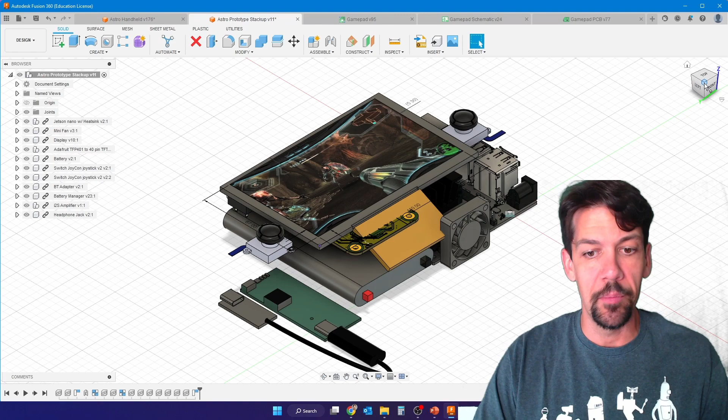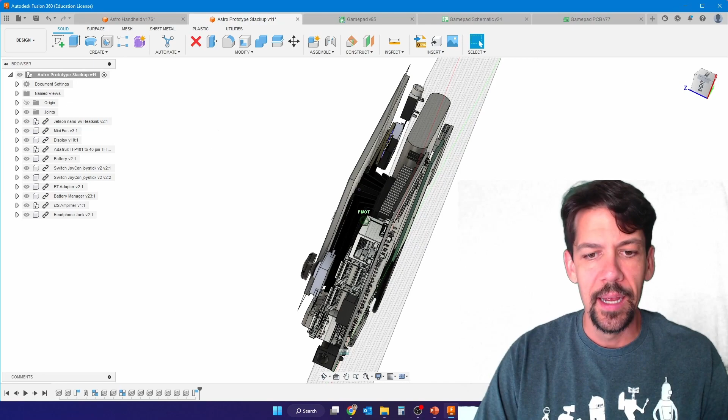The first thing I did to figure out if everything would fit was model all the things I already knew I could use that were in my junk drawer, or find existing 3D models for — for example, the Switch joysticks, the Jetson Nano module itself. I modeled the battery, the power distribution board, the fan, and all the big components myself, or found 3D models for them. I was also able to find 3D models for off-the-shelf boards like the amplifier module and the HDMI to TFT board from Adafruit.

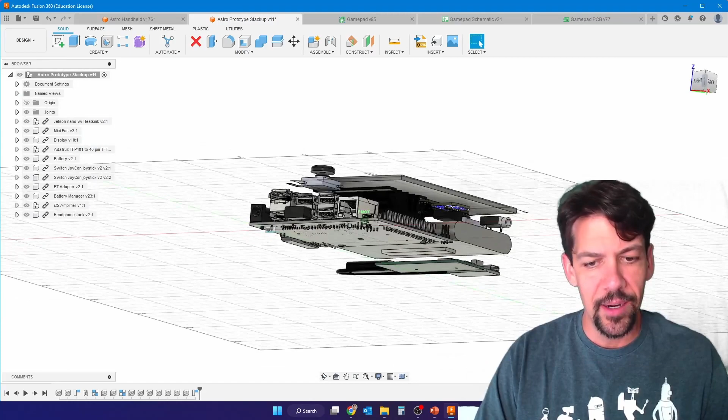I spent a lot of time figuring out how all these components would fit together in the most efficient space possible, trying to get that into a handheld form factor. You can see it's pretty crammed in there.

The majority of the problem was figuring out how to get the heatsink in there. If I had replaced the heatsink or used a different cooling solution, I probably could have gotten it a little thinner, but not too much, because the battery is also very thick, and there's going to be some electronics in between anyhow.

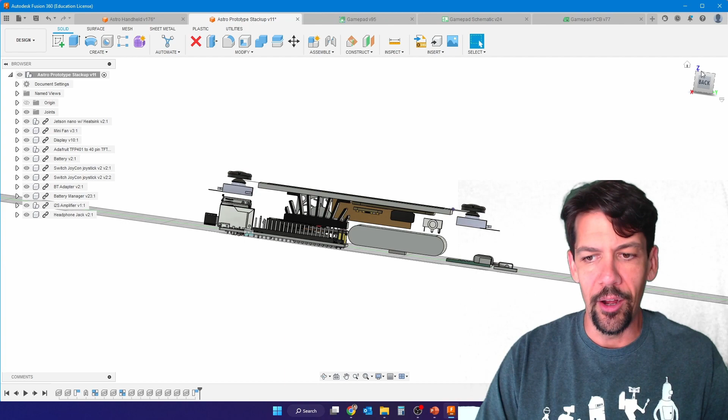This stack-up was really useful, and I used this arrangement of the electronics as a framework to build the case around. Rather than building the case first and figuring out how components would fit inside, I started with getting the components where I wanted them, then built the case around them, which actually worked out really well.

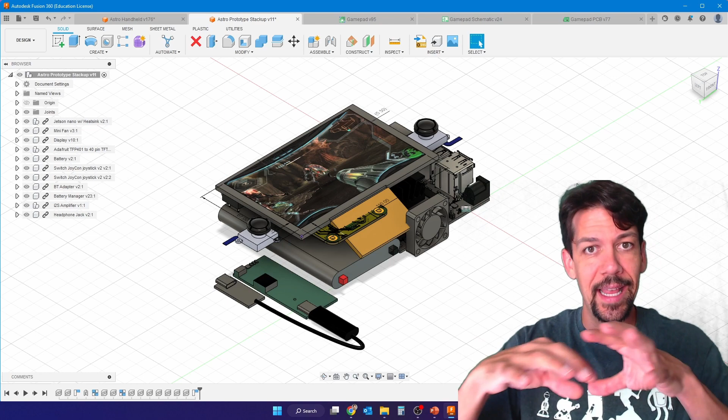I was going back and forth with design and electronics, figuring out all these different things. I was also doing power tests, focused on figuring out if I could run the Jetson Nano off the battery bank system I had, and if I could push enough current to do those high performance emulation tasks.

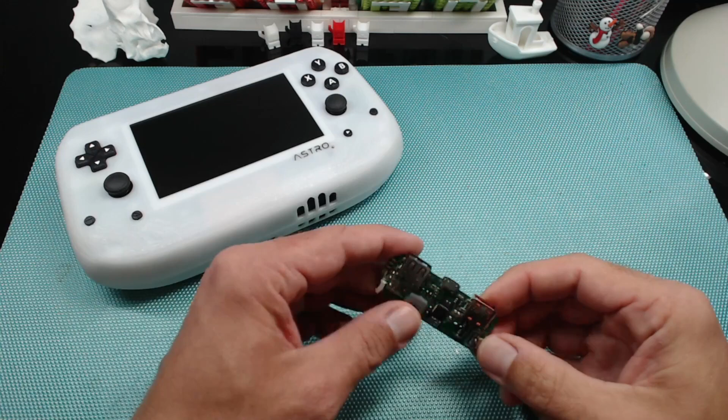For power, I had these 10,000 milliamp hour power banks with outputs that could supply combined, I think, up to 4 amps total, probably more. Inside them there's a little manager board where one output is rated for 3 amps and the other for 1 amp.

I ended up testing to see if I could combine them so that in parallel they both provide enough current to drive the Jetson Nano, and that worked out really well. I originally thought I could talk to the fuel gauge microcontroller chip on this thing directly using I2C, but it turns out there's a secondary microcontroller that manages the power delivery of this management board.

So I couldn't talk directly to it without sacrificing power management, and there wasn't a breakout for it. So it ended up being a little weird, but I was able to fit the battery and the power management board in the system, and I used the LEDs on the side of the power management board as the battery indicator through the case, which I think looks super sharp, and I'm really proud of that part.

I had originally connected the battery using 1/10 of an inch headers and header pins, and it turns out those are not rated for the amount of current that this thing needs. So I had some brownout difficulties when my original testing with just the power bank had worked just fine. I identified that by accident, actually felt after doing a run, the connector had heated up a little bit, and I was like, oh, I'm an idiot.

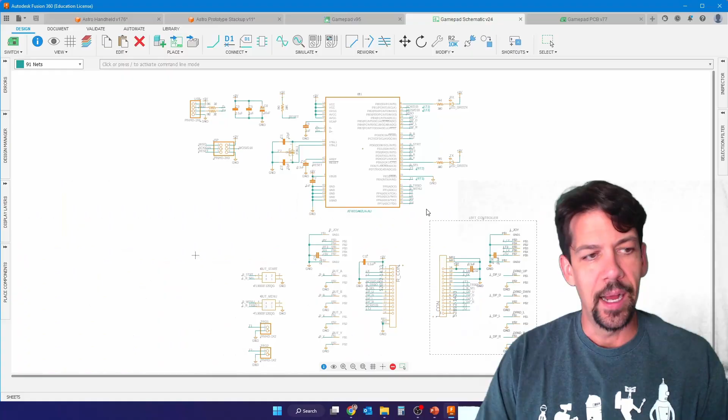I could design the gamepad schematic, lay out the printed circuit board, and then translate this PCB layout into a three-dimensional model that I could include in my major design, all in one thing. Any changes I make upstream in the schematic or the PCB layout automatically get changed in the design as a whole, which is really, really cool.

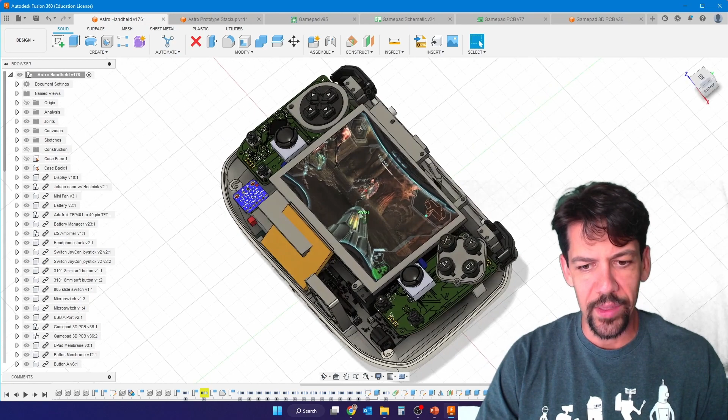Also, all of the interaction between all of these components is really, really powerful. So for instance, let me turn off the case face - this is the device without that case face on it. You can see I modeled the D-pad, the buttons and membranes, the joysticks were already modeled, I included the PCBs, all kinds of stuff. Any changes I make to those positions, all of the holes in the case face are related to the position of those things. So layout and changing things is as simple as moving the objects around in the model environment, and the rest of the design updates around them.

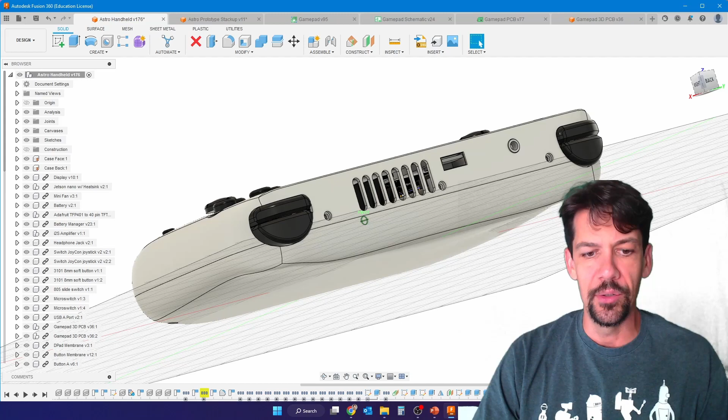That became super handy when I was going through iterations to design the trigger buttons and shoulder buttons. I went through like 4 iterations, trying out different things and seeing what worked - every time figuring out where the cutouts are and what the design for the buttons should be. I could design all of those things upstream and the whole cutout would change, and doing revisions on them worked out really well.

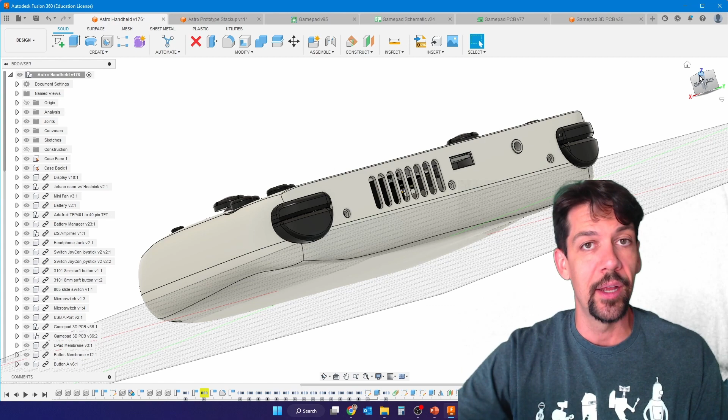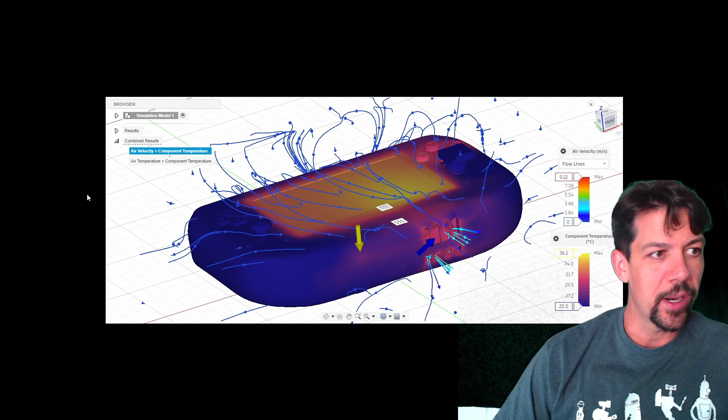Fusion 360 also has some really amazing tools for doing thermal analysis. Once I got the majority of the design constructed, I was able to set up the airflow characteristics and thermal characteristics of the Jetson Nano under load and do thermal analysis of how the system would perform under these conditions, and what kind of temperature performance I could expect. I don't think these are perfectly correct, but it gave me enough confidence that I'm not going to hit the thermal limit of the Jetson Nano.

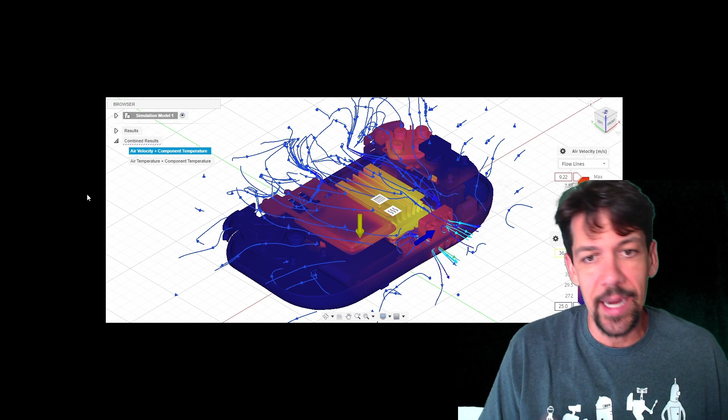So with active cooling, even this tiny little fan, which actually has pretty good airflow, is going to be able to handle this issue no problem. In actuality, when it's running, you can feel the heat coming off of it, but I've never hit the thermal limit running any emulator.

I learned a lot of this stuff from the Product Design Online YouTube channel and the Autodesk YouTube channel itself. I watched a lot of YouTube about how to integrate product design across all of these different things, looking at their workflows and what tools they use to take advantage of it.

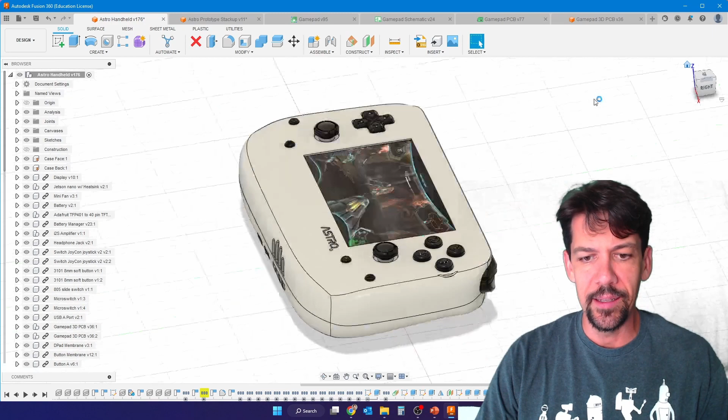This particular design is a combination of lots of different pieces, starting with this base form that's just a generic 3D model I used in the form environment. Rather than working from a strict design, I started with something about the right size and crafted it to fit, using the spline environment.

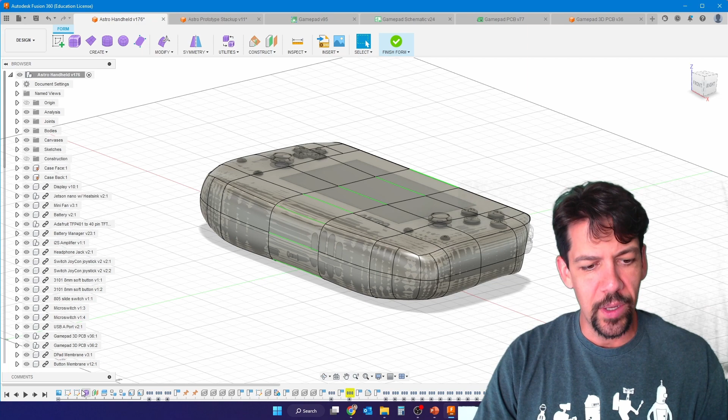Once you progress through all of those components, you can build on the mechanics piece by piece. So from that base form, I could make a shell, then start building up the different components for mounting things, like the bosses for putting the case together, the fan grills, mounting points, all kinds of stuff. Each one is its own set of sketches and modules, and because it's all built and related together, it's really easy to integrate them and make changes later on.

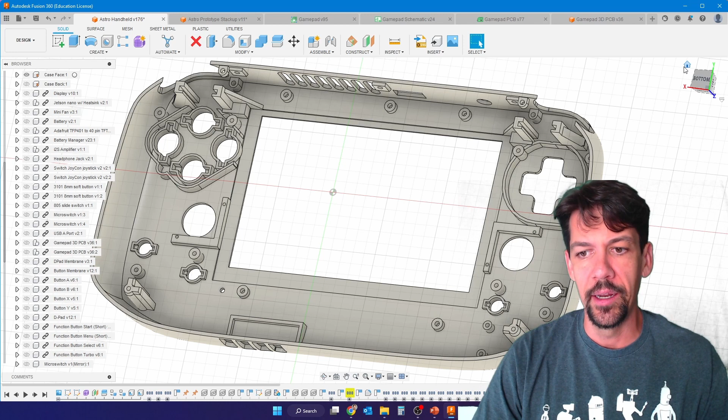I had a lot of fun doing this, learning Fusion 360 and upskilling my design skills, figuring out how to do all these different things. It was really interesting, and I had a great time doing it. I cannot recommend Fusion 360 strongly enough—it's a really powerful tool, and if you're able to get access to it, I highly recommend it.

Next, I want to talk about my controller design process. I wanted a layout that was pretty comfortable, that used stacked shoulder buttons, and had good responsiveness. I've been using an 8BitDo controller that I really like, which has the Super Nintendo layout in terms of the buttons and how everything was arranged.

So I went and found Super Nintendo replacement membranes that I really liked, and based the design around those, as well as the controller board design from the RetroLite CM4.

What I started off with was prototyping the whole control system on a breadboard, so I know the joysticks work, and to get an understanding of the software and all the buttons and how everything works. I used an Arduino Leonardo that can behave as a human interface device, so I could make sure everything worked in concept before implementing it, checking that it worked with RetroArch and stuff like that, as a sanity check.

As I was designing the printed circuit boards, I wanted to make sure I had the physical layout right. So as the boards were coming together, I printed out outlines of those, as well as where the button contacts would go, to make sure my membranes lined up correctly with the button contacts on the board itself. I did have to make some adjustments, so I'm really glad I did this.

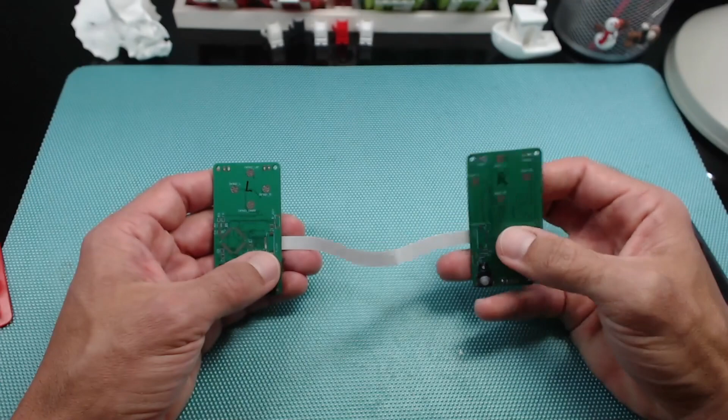The printed circuit board design I ended up with is a single PCB that is both the left and right controller—both sides of the same thing, connected with an FFC connector. On one side is the microcontroller, an ATmega 8U or something like that, which has the USB human interface device on it.

Both sides of the board have both sets of contacts, so it's one board you get manufactured and then just flip over for the other side. This is the left side, the left controller with the D-pad on it connected to the FFC, with the face buttons on the other side—it's just a mirror of the board.

I knew that most manufacturers will give you at least 5 copies of a board, so I really only need 2 of the same design—it's a little bit cheaper, and everything's on there. Then I've got menu buttons, turbo, select, and start on the other side, and all of the electronics that support it on this side.

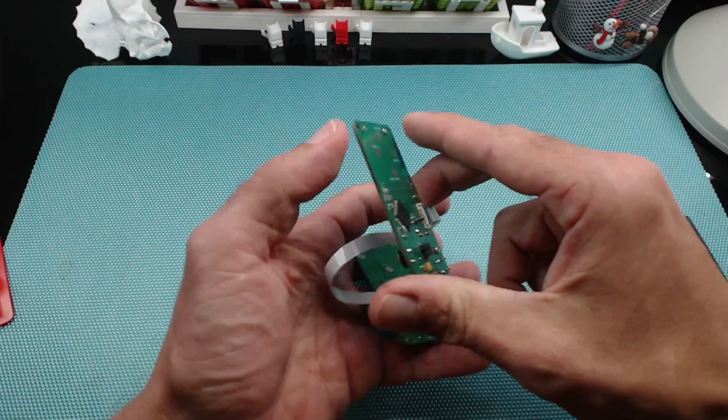And these are the joystick connectors. On this version of the board, I screwed up the joystick connector interface, and I had to do another revision of the whole thing anyway. As well, you can see I had the clock rewired incorrectly on this one too, so I had to do another version of that.

But when it all came together, it came together really well, and I like how they feel. It's nice and clicky. I think there could be a little bit more support on this side, but having these controller prototypes as I went through was really useful.

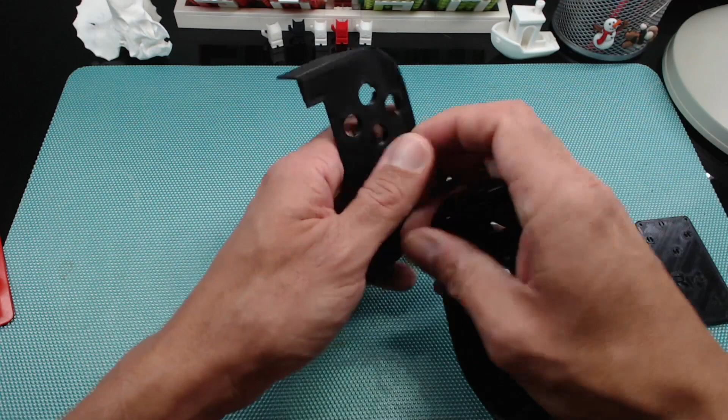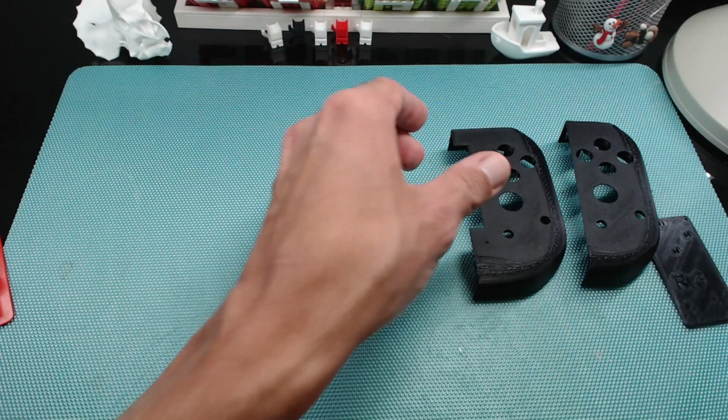So this is the second-to-last version of the controller prototype. I went through two others, and I was mainly focused on trying to figure out what kind of shoulder button style I wanted. I started off with them separated — they were really small and not very nice. Then I had them stacked and a little bit bigger, but I ended up with a final design where the main trigger, the L2, is a little bit bigger, and the shoulder is a little bit smaller.

I think the next version of these, I want to separate them with a little bar and push this one a little bit lower, because there's still not enough tactile feedback on which one you're pressing, and this one doesn't stand out enough from the big one. But it's definitely playable — I've played a few games through that use both of them, and it feels pretty good.

They use micro switches in these little recessed wells here. There's a printed circuit board inside that has two micro switches pressed on them, and they're sort of mouse micro switches, so they're super lightweight, a little clicky, but not bad. I like the feel of them.

There's also, in the controllers, these little support stubs, and what they do is when the case comes together, it supports the back of the board and makes sure that pressing the D-pad and the face buttons is really, really solid. I'm also hoping it'll help with joystick drift and supporting that, making sure this board doesn't take all the stresses of me intensely gaming as hard as I can.

This is the first fully printed and assembled version, and you can see I printed in black. I thought I was going to do a murdered-out version all the way through because that looked good in the renders, but I started switching over to white later on.

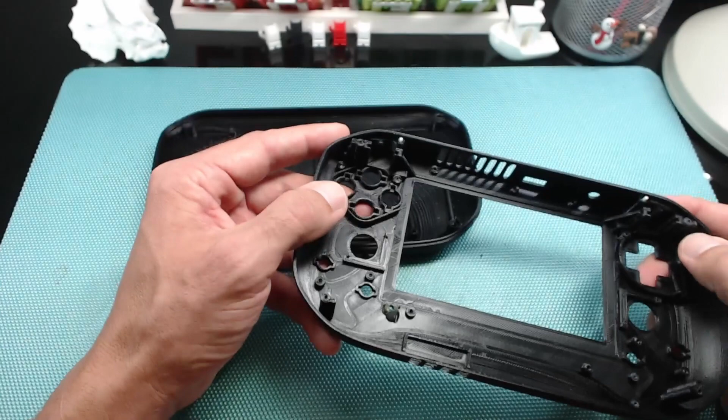I also strengthened the bosses that hold the case connector and case together, sort of fixed up everything. This one used hinged shoulder buttons, so they have a little hinge here and they work together. The hinge pin is just another piece of 3D printer filament. These worked out pretty well, but again they weren't big enough, so it didn't feel like enough of a difference between them.

The final version has all the same features. Instead of a little window that has the LEDs for the power board, these two cases were printed in PLA, and it was kind of brittle and would kind of snap off. I started learning to print in PETG, and I really like how tough it is. It's a little bit more flexible than it is brittle, and it's also a little transparent, which I thought was cool.

So I used the transparency to have the power LEDs come through on the bottom, so it's a straight-through indicator, there's no window or anything there. And then there's a little bit of black inlay. I use this white PETG, which is a little bit transparent, so you can kind of see some of the components through it. Eventually I'm going to print a fully transparent case.

Did a little bit of sanding on the case itself. I like the color of it, so I'm not really worried about the color or texture, even though you can see all the printing contours and stuff like that, but it feels good. I'm not going to paint it. I'll probably do a transparent version later on because I want people to see all the hard work I put on the inside.

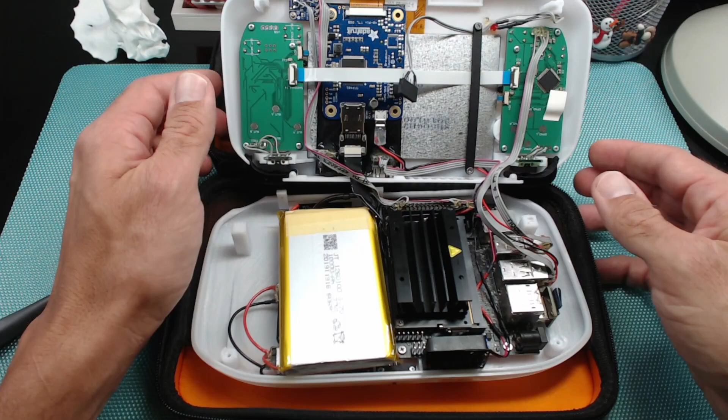But here's everything — we've got the battery, the Jetson Nano itself, the cooling fan, and a little 3D printed one-layer-thick infill-based fan grating. We should probably make this smaller so that little bits and stuff don't get into the fan.

And then over here there's an HDMI cable, a flat HDMI cable from Adafruit that runs under the board and up to the display controller, which connects to the 5-inch display on the front of the case. We've got the controller boards — I won't take those apart because they're a pain to get back together.

This is the audio board, and it's kind of in a weird place because I didn't plan super well for where it would go. It's a little bit far from the headphone jack over here. If I was going to do this again, I would expand this I/O carrier board.

So the display is held in with this little bar and the I/O plate here. The I/O plate is screwed into the case in three places — one screw down here, one screw over there, and one screw up there. That holds the display on, as well as it's got cutouts for the display controller, the headphone jack, which I stole from a laptop, and the USB host, which I also stole from a dead laptop, and that carries everything with it.

This is the power connector for the display board, which just connects to USB down here. The power comes in through the high current inputs on the Jetson Nano I/O header, and then there's the power switch down here.